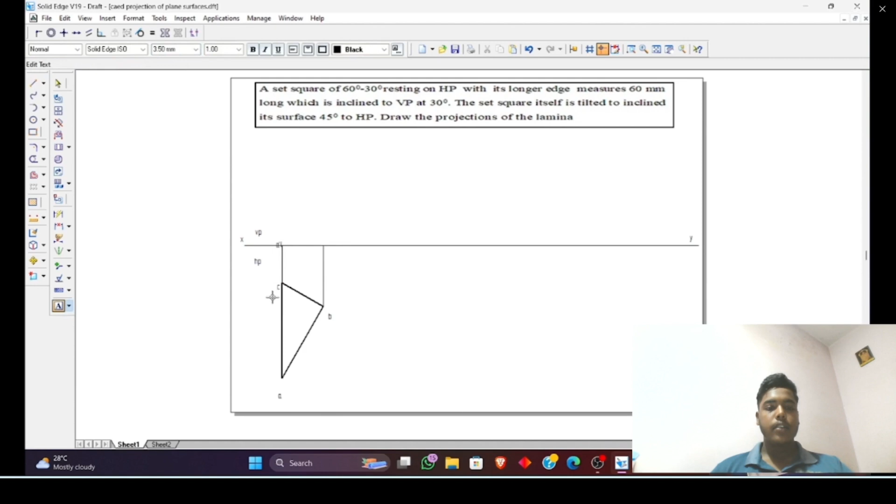After naming the triangle, we project the lines upward from A, C and B. We name the projected lines A dash, C dash. Before that, we draw a visible line and name A dash, C dash. Here it is B dash.

Then we select the whole line so that it will be copied. We press the move option. From a point, after selecting, we move the particular point, so we copy and move it.

After moving it, we have to rotate the line to the given angle, so in the move option we get rotate. There we rotate, keeping a step angle and position angle, so we can rotate to our convenient angle.

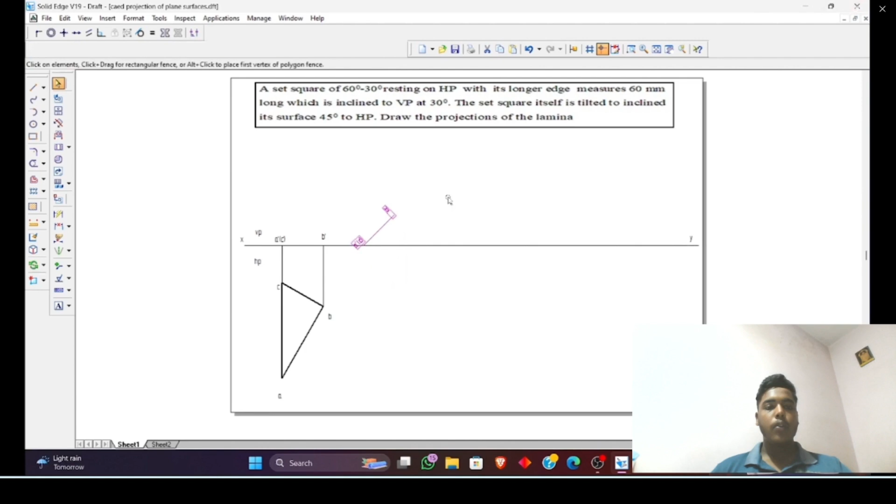After that, we rotate the angle to our convenience, 45 degrees above the XY line. Then we project two lines downwards. Before that, since the lines are different, we convert them into visible lines.

Now we project the lines downward from A dash, C dash, projecting till a point. Then we project the line downward from B dash.

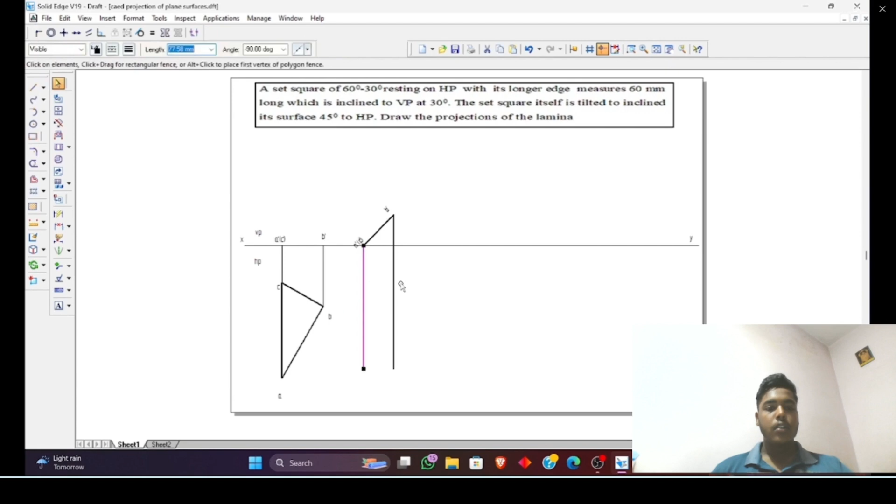After selecting, the line should be a normal line. Then from C, the previous square, we project it to the extended line. From B we extend to B dash.

Now we select a visible line and draw one more square. As we join the lines, we can see we got a square. Now we name it, as in the previous square, A, B and C.

Now we take an angle of 30 degrees to VP. First we erase the unwanted lines, then take 30 degrees. The length is convenient, and we take the angle as 30 degrees.

I have to take minus 30 degrees so it will come below the XY line. Now we select it and convert it into normal lines.

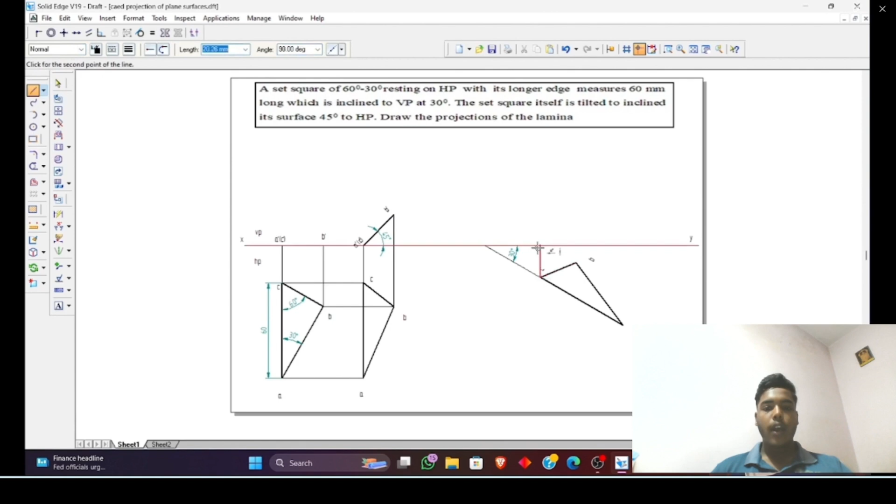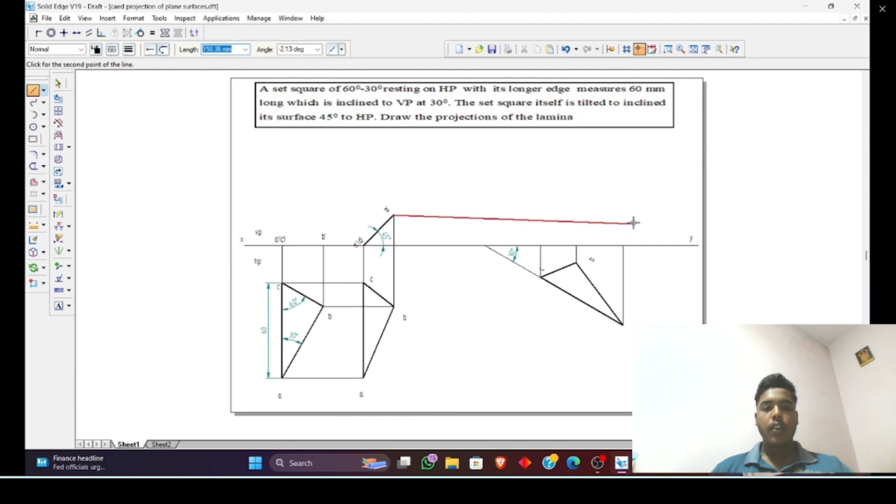Now we extend the lines to the XY line. It should be a normal line. Then from the second square we extend like from B dash, and extend it again from B to B dash.

Then we select a visible line so it is visible, and we join it from C, B and A. Now we name them A dash, B dash, C dash.

Now we have to give the leader, which is the angle from which it goes upwards or downwards, for the line we extended. For that we use the leader option.

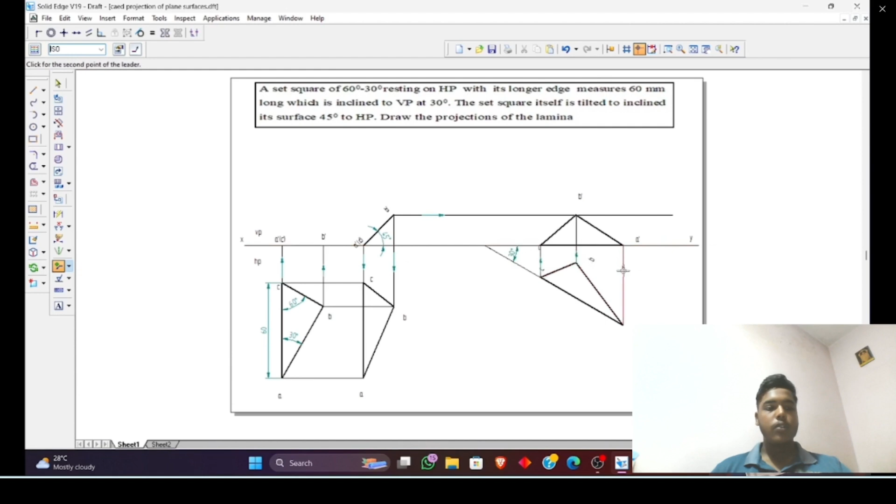The second question: a pentagon lamina of edge 25 mm is placed on HP with one of its corners such that the plane surface makes an angle of 30 degrees with HP. The perpendicular bisector passing through the resting corner appears to VP at 45 degrees. Draw its projection. First, let us take a normal line and then draw the XY line.

Then we name it X, Y. We give VP above the XY line and HP below the XY line. Then we select a line to draw a pentagon.

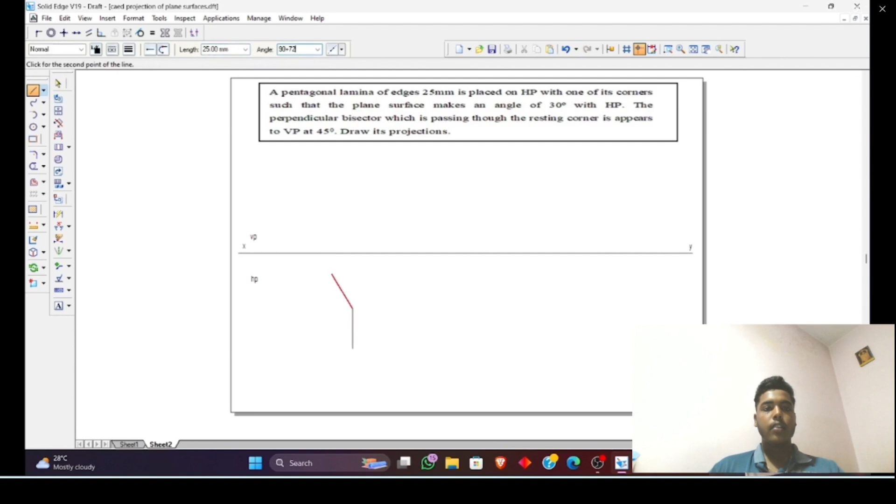First, the length given is 25 mm. Length equals 25, angle equals 90 plus 72. Then for the next point, length 25, angle 90 plus 72 into 2. For the third angle, length is 25, angle is 90 plus 72 into 3.

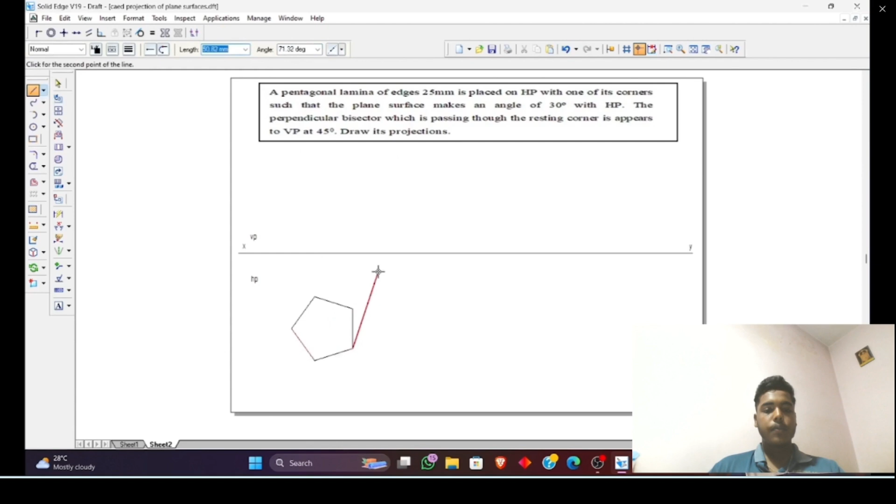For the last angle, we can join, or else we give length 25, angle 90 plus 72 into 3, and also join the two endpoints. Now we have got a pentagon.

We select it and make it visible. Then we project all the edges to the XY line. For projecting, we have to use the normal line.

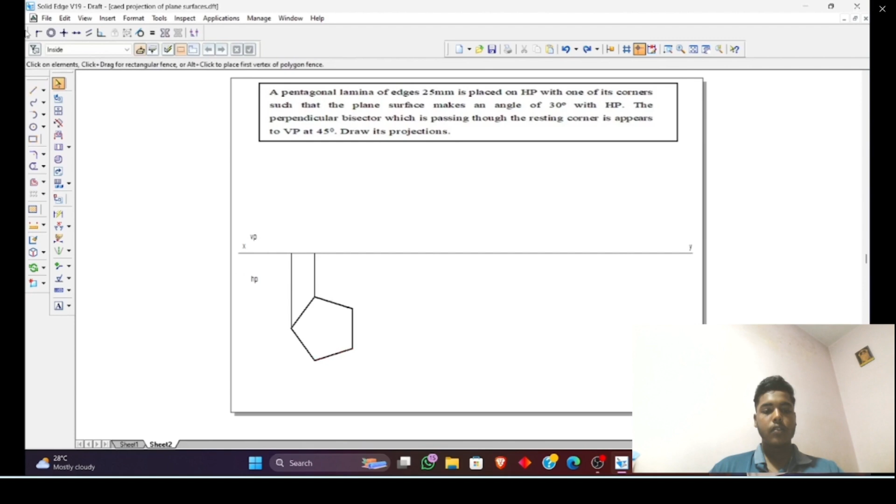We have to project all the lines from all the corners. Now we have to name it. For naming, we have used A, B, C, D, E. Then above the XY line, we have given A dash, B dash in bracket E dash. Then for the last projection lines, we are using C dash and in bracket D dash.

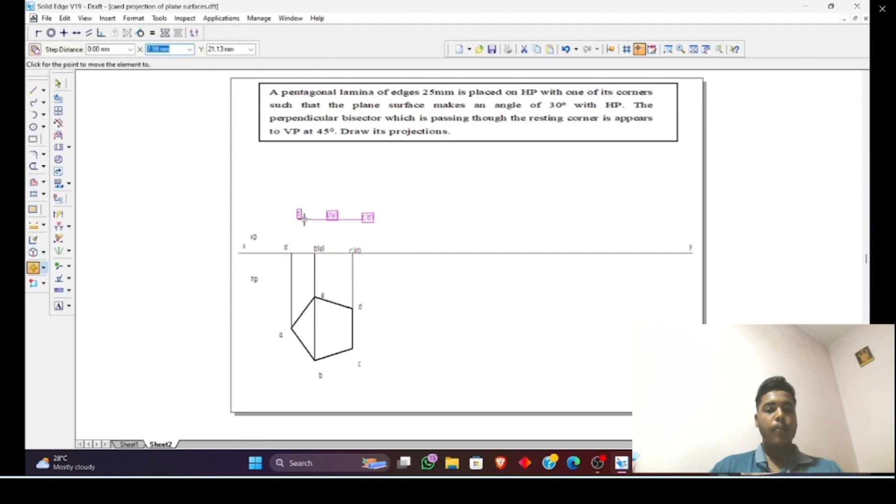Now, as we have to draw a line on the XY line, we could copy it from A dash to C dash. We have drawn a line. Then we have to select the line which we have drawn with the namings. After selecting, we have to move the line at a point. We will take A as the point, A dash as a point. We'll move to the next of the XY line.

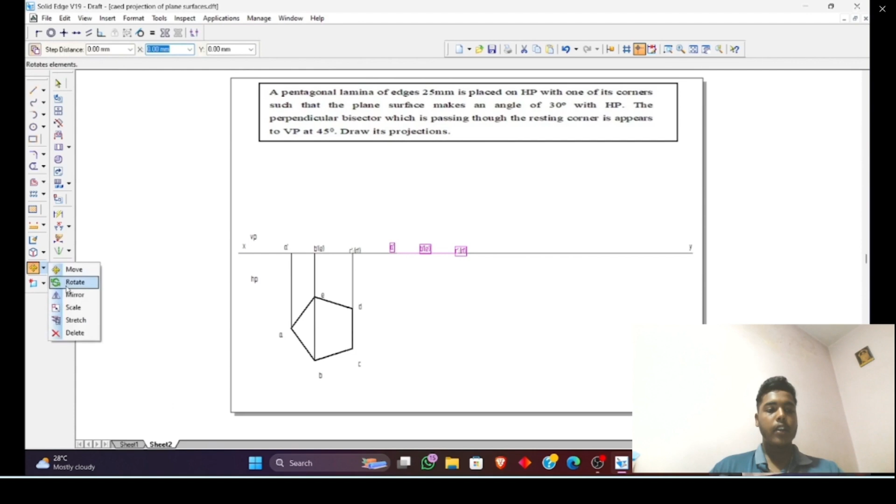Then we have to rotate it. We have to take a stationary point and the positional angle, and the rotation angle will be 30 degree. It will be above the XY line, that is, it will be above the VP. One sec, we have to rotate. Select both the endpoints, rotate angle, we have to give 30 degree. Now we can see it is above the XY line.

Now we will give the arrows, that is, the lines which are projected to the XY line. After giving that, we have to select the line which is normal. We have to change it to visible line.

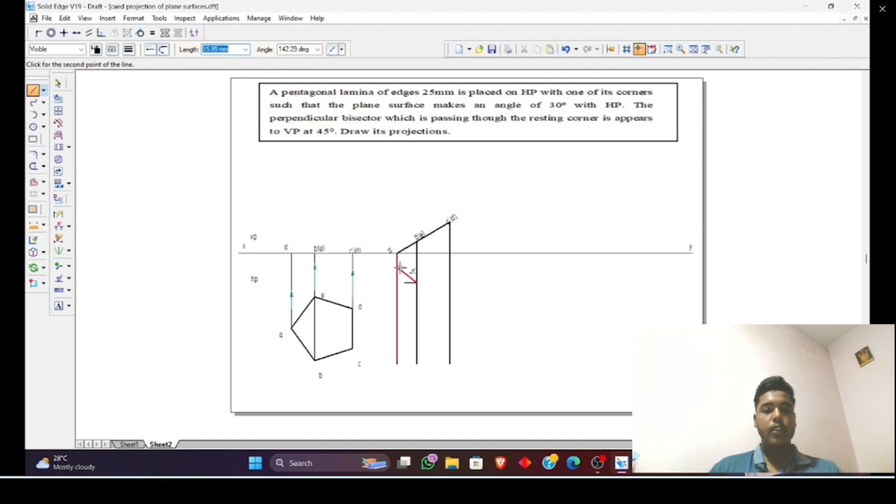Then we have to project the lines downwards. So from A dash, we are projecting downwards. From B dash, bracket E dash, we are projecting the line downwards. The angle should be minus 90, so it will be directly downwards. Now we have to select the lines because it is in visible line. After selecting the lines, we have to change it to normal lines because it is projecting downwards. We have to use normal line.

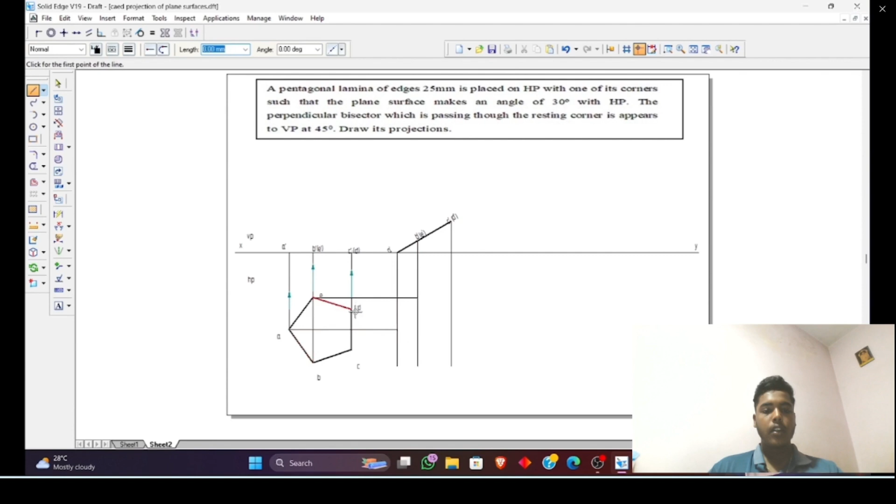Then from the first pentagon, we have to extend the line. From A, we have to extend till A dash. From D, we have to extend to D dash. From C to C dash. After extending all the lines, we have to select the line and convert it into visible line. From that, we have to join the pentagon. After joining it properly, we get a pentagon.

Now we have to trim the unwanted lines. Whatever the small lines, we have to trim that, so it looks neat and clean.

Now we have to take normal line, and we have to keep the length convenient, and the angle should be minus 45. After taking that, we have to use the leader to extend the lines so that it will be easier for the reader, downwards, so we have to place it downwards.

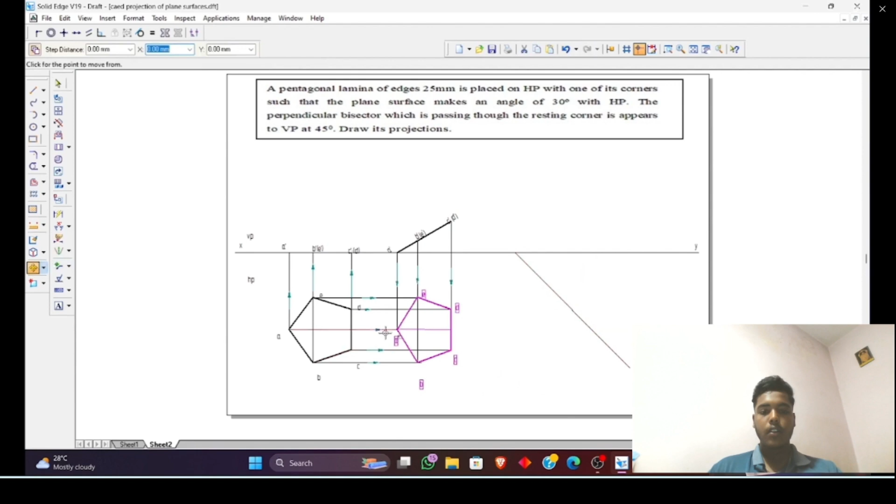Then we have to rotate it. The copied pentagon should be rotated. We have to take A and C as a stationary line. Then we have to rotate so that it is on the line.

Now we have to project the lines upward. The pentagon which we have taken, we have to project the lines upward till the XY line. We should make sure that the lines are proper, they are in a straight line, or else we will not get the proper pentagon. The required answer will not be proper.

After extending to the XY line, now we have to extend from C dash and B dash, the previously taken pentagon. From there we have to extend till the namings like E to E dash, D dash to D. By extending more, we'll get the required pentagon. Now we have to select visible line so that it is visible. Then we have to join all the points.

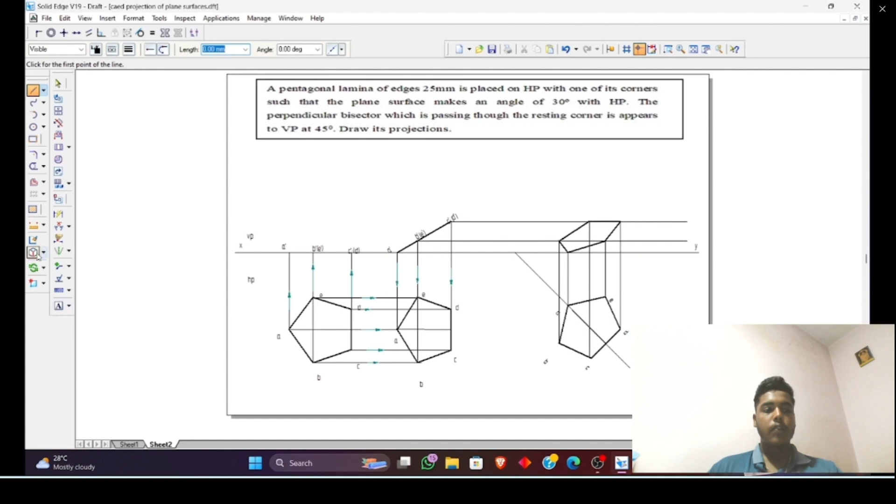After joining all the points, we have to give the rotation angle. The extended line we have to mark so that it is easier for the reader. As the lines are projected upwards, we are giving the arrows upward. After that, we have to name the final pentagon A dash, B dash, C dash, D dash, E dash.

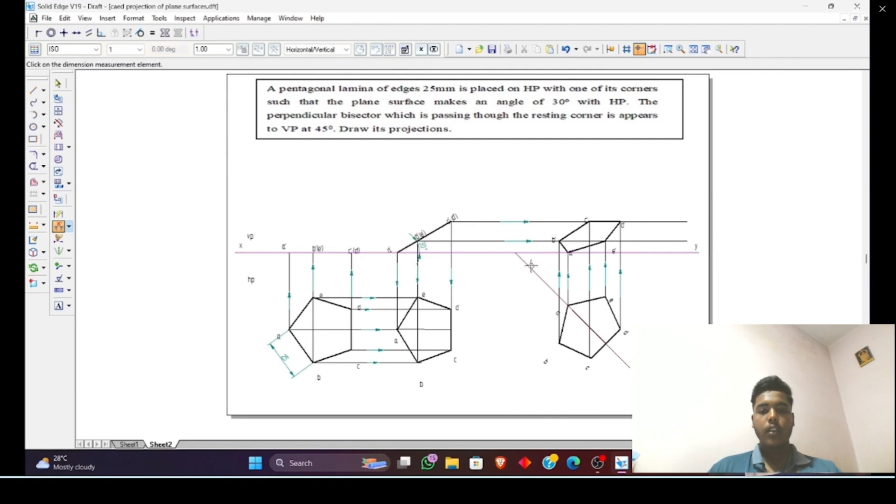After that, we have to check the length, that is, it is 25, as we should know the angle, it is 30 degree. To know the final angle, that is 45 degree.